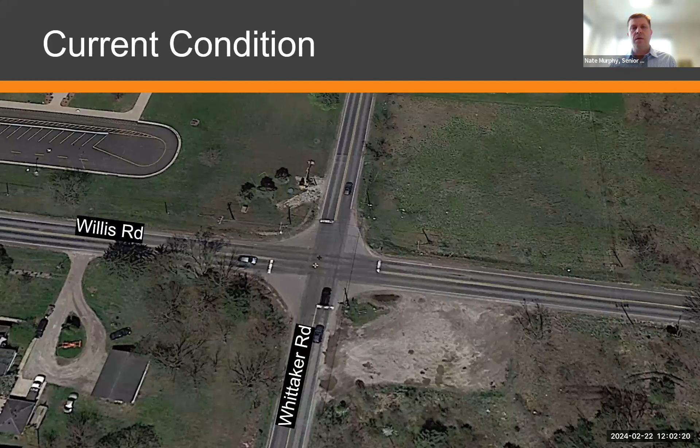The next slide shows some of the traffic. The street view there shows the backups that can occur, especially with Lincoln Consolidated School so close. This is the type of backup that we're going to try to alleviate, and we're putting in a roundabout to help with that.

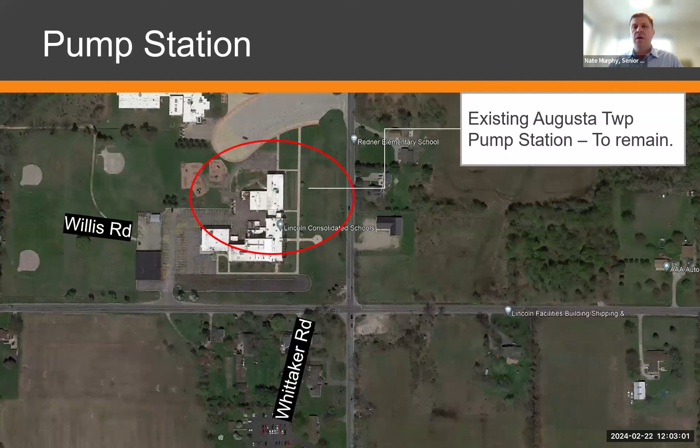I want to go to the next slide and talk about this right up at the beginning. Because of the work that's going on, there was some confusion about the pump station. We will not be moving anything associated with the pump station. We've been able to design around that. So wanted to let everyone know there will be no change to that pump station for the Augusta Township facility right there in the northwest quadrant. So we just want to let you know that first off.

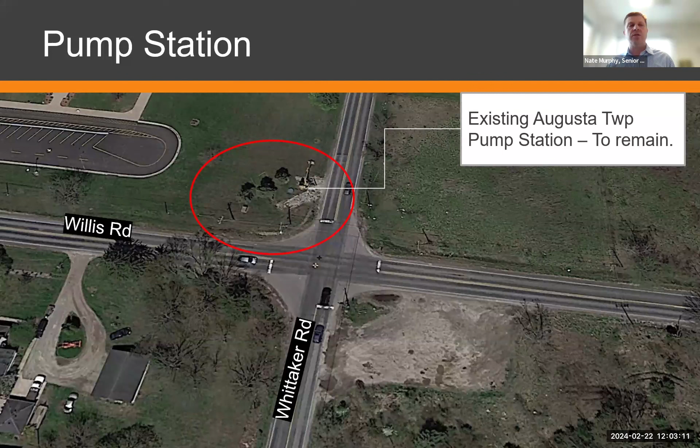Next slide, please. The plan will be to build a single lane roundabout. We have ongoing utility relocations that are progressing. These will continue until we actually close down the intersection. They are slated to begin at the beginning of our project, a gas relocation that will start after we have closed down the intersection. This will help with the traffic management during that work. We have to cut into the pavement, so that will be the first part of our work. Following that gas relocation for DTE gas, we will be moving toward installing the drainage, the storm sewer.

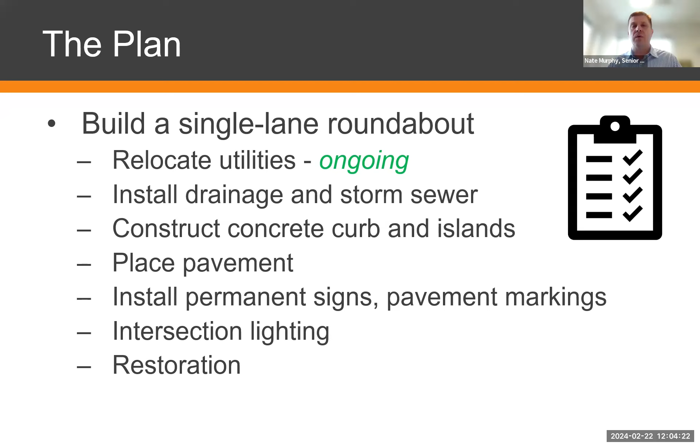We'll be constructing concrete curbs and islands, and we're going to go through some of these with pictures later. We're going to place the pavement. We'll be installing permanent signs, permanent pavement markings, and intersection lighting. After that, we'll do the restoration for the grass, etc., on the outside where disturbance has happened. Next slide.

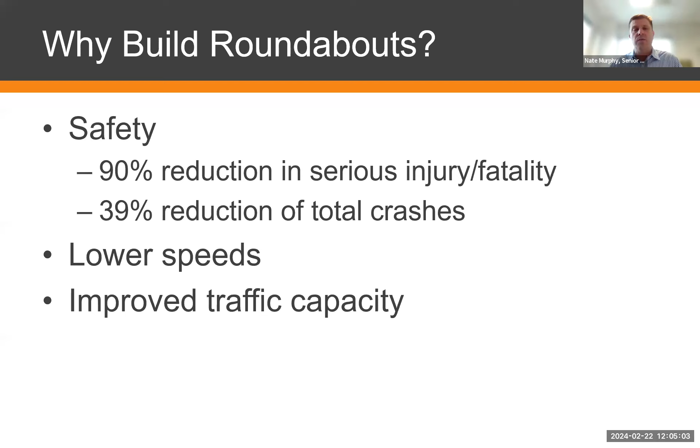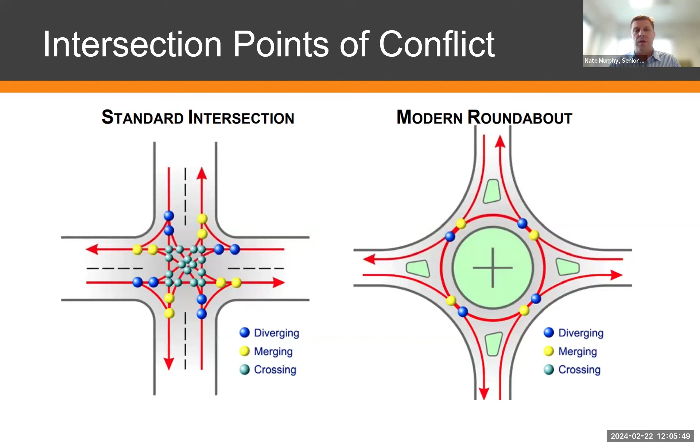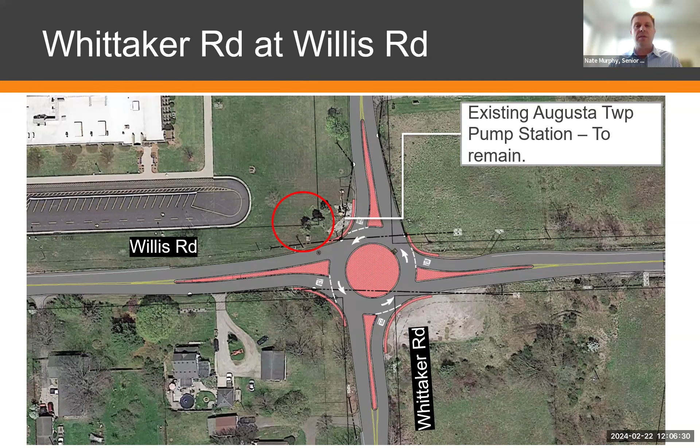Our project is being let through, or it's facilitated through the MDOT federal aid project that is currently out for bid right now. We expect that the contractors will have their bids in, and we'll find out who that selected contractor will be in March.

The project itself, we have scheduled to start on June 3rd. As I had mentioned earlier, the first two weeks will be a relocation of the DTE gas facilities, and then our contractor would come on to the site after that, on the 17th. And we have a mid-August completion date.

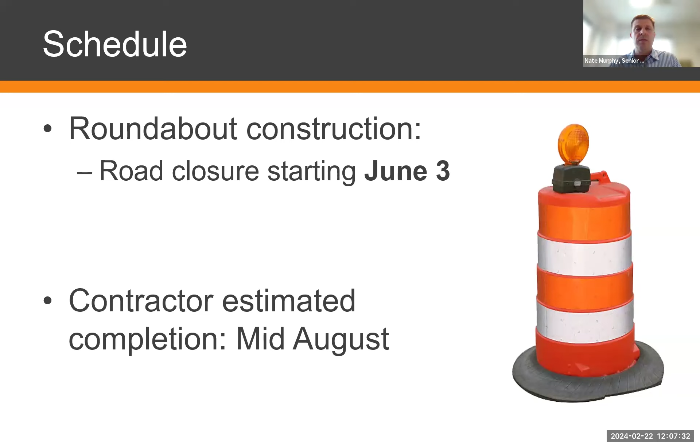Keep in mind that this construction schedule is dependent on weather, that can sometimes impact what is happening. We have unexpected utility conflicts that might come up as well that could impact that schedule, and also the contractor scheduling. So we keep this schedule as tightly as we can, but understand there are issues sometimes, and that could end up delaying it. We do feel that we have sufficient time built into the timeline for them to get the work completed, and hopefully it will not be impacting the school year and coming in the fall.

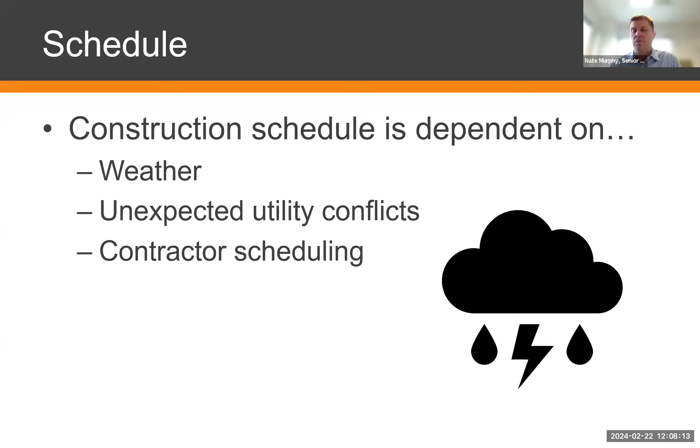For the project funding and costs, we are using federal money that is facilitated through the MDOT process, as well as the Michigan transportation funds that will be split between these. The overall project cost will be $1.3 million.

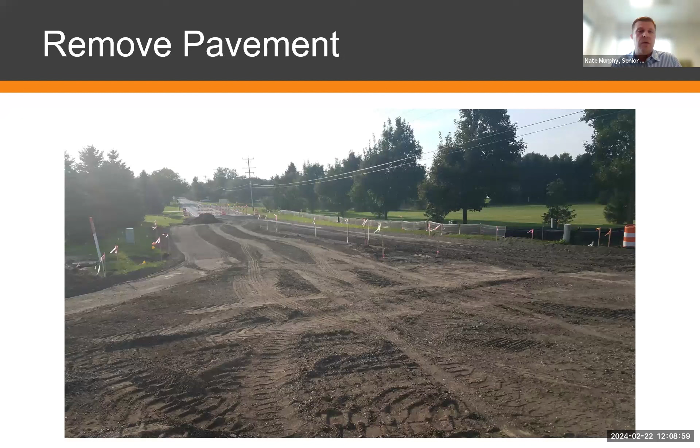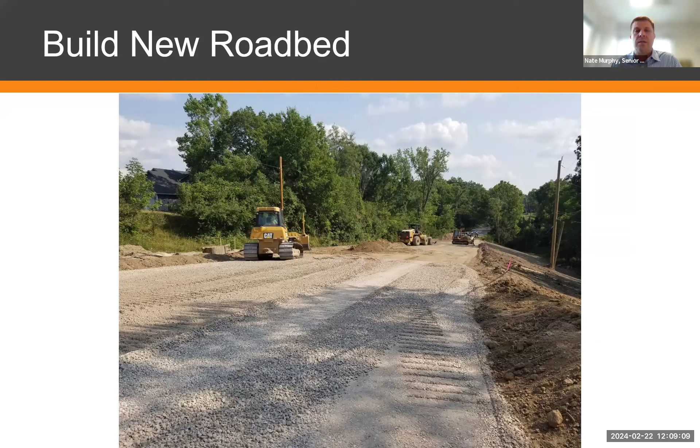To walk through the steps of the project: the first one would be removing the existing pavement. After we've closed the intersection, they'll remove all the existing pavement, and then we'll go to putting in a new road bed. This will be an aggregate base, a limestone aggregate base that we have been using, and creates a good base for the pavement, followed by installation of the concrete curb.

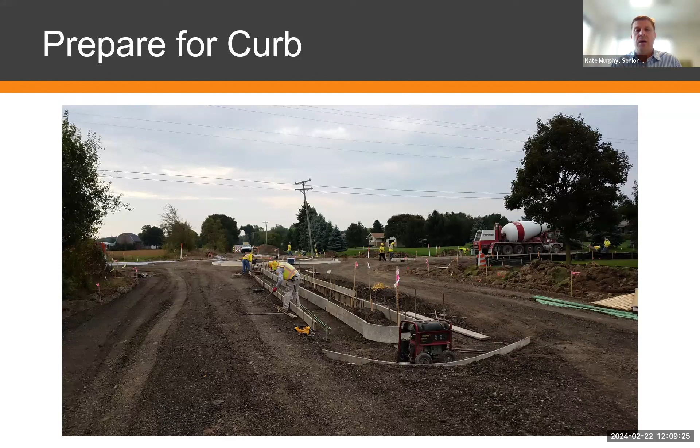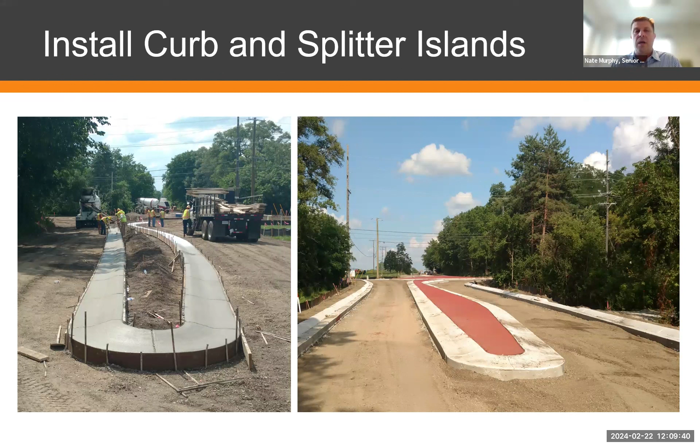You can see here the forms are in place in preparation for that curb pour. And then once that's poured, you can see it here. This is one of the splitter islands. The curb would go in first, and then they fill in the center of that with the colored concrete. The colored concrete will be red, and it'll be stamped as well. This adds to as the driver approaches the roundabout, it provides a visual to help guide them through the intersection.

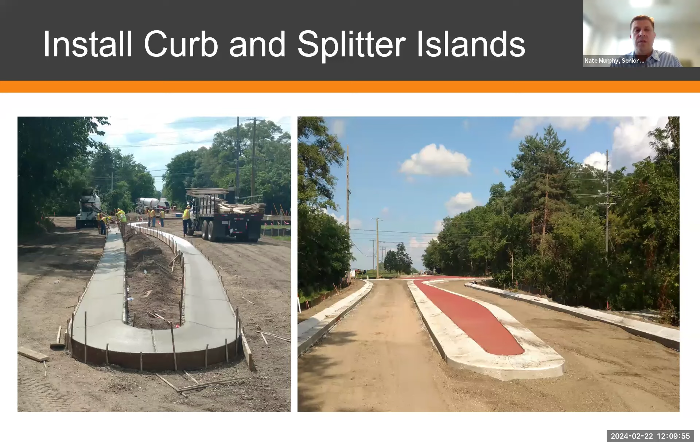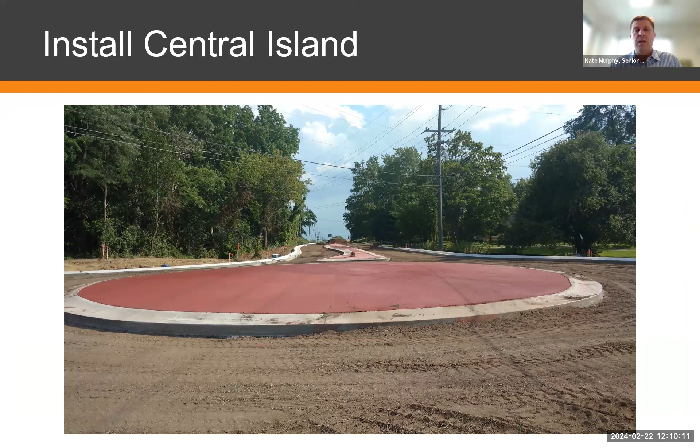In the center, we'll be also doing the concrete curb as well as a concrete infill in the center. It'll be a solid concrete pad, similar to what we did at Bemis and Whittaker last year, so it'll be very similar to that. It'll have the red stamped concrete. And once that's done, we do the HMA paving, the asphalt paving.

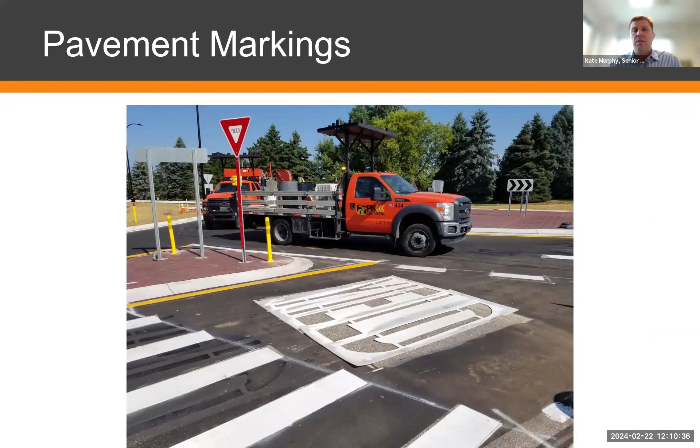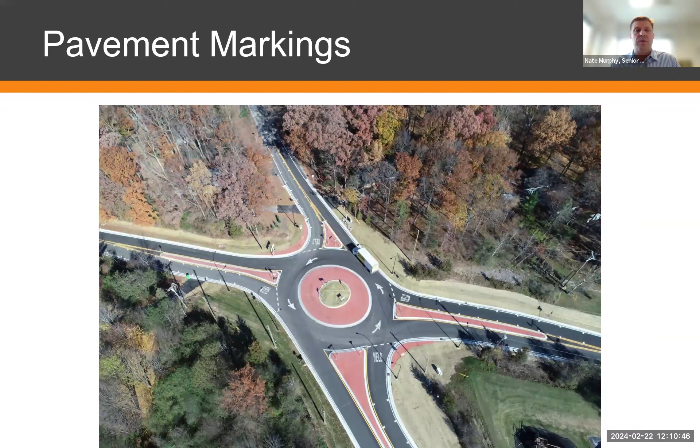Followed by the pavement markings. Here you can see they're putting in the special pavement markings to help guide the motorists. And this gives an aerial view showing all of the arrows that we put in. Hopefully you're familiar with these as you've traveled through these roundabouts throughout the county.

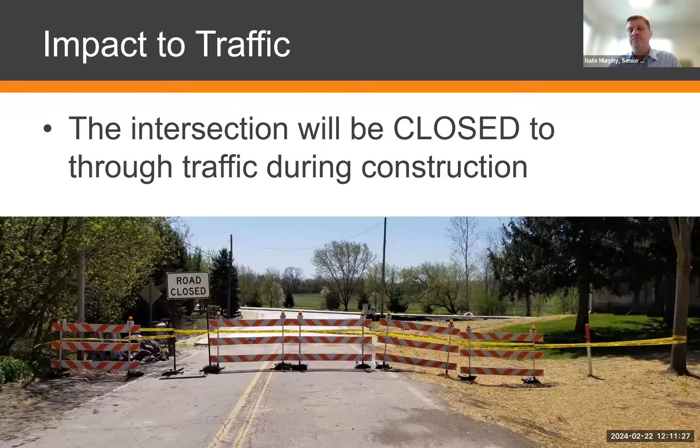Just a reminder, we ask that you honor our closure. We will be putting in a full closure for this project, and this will require that all traffic not go through the intersection, both for your own safety and for the safety of the workers. This full closure will help move the project through quicker. We just ask that you honor that when we say closed, the road is closed, and do not enter the work zone. Here's a picture of our detour.

We have Whittaker to Willow, Rawsonville, Martz, Textile, and Stony Creek to bring you around. We know that most people will find their own way, but we do not sign a detour on primary roads off onto local roads. We try to keep, if it's on a paved road, as much as possible, them on a paved detour. So this will be our signed detour.

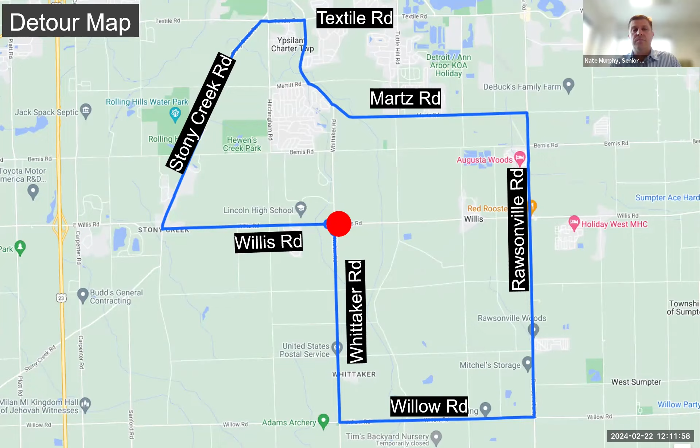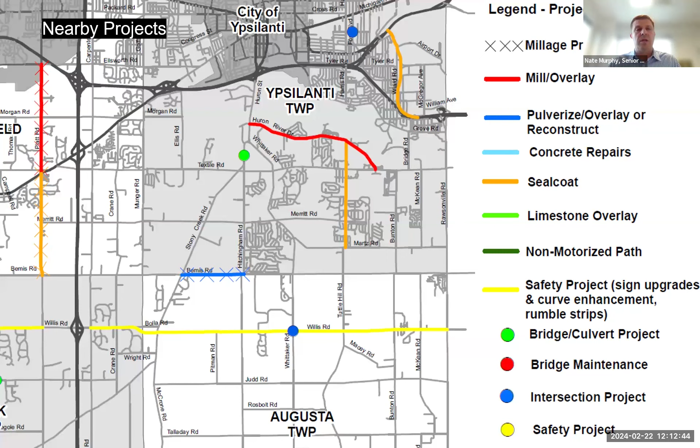Just a reminder, we do have other projects that are going on this year in the area. As noted in this map, you can see Whittaker and Willis there with the blue dot. Later in the year we'll be doing work on Bemis Road between Stony Creek and Hitchingham. Also up north of that on Stony Creek, we'll be doing a bridge that's in that little triangle up there, you can see the green dot, as well as some other HMA paving. So just wanted to give you a picture that there is a fair amount of work going on in the area during this construction season, but wanted you to be aware of it.